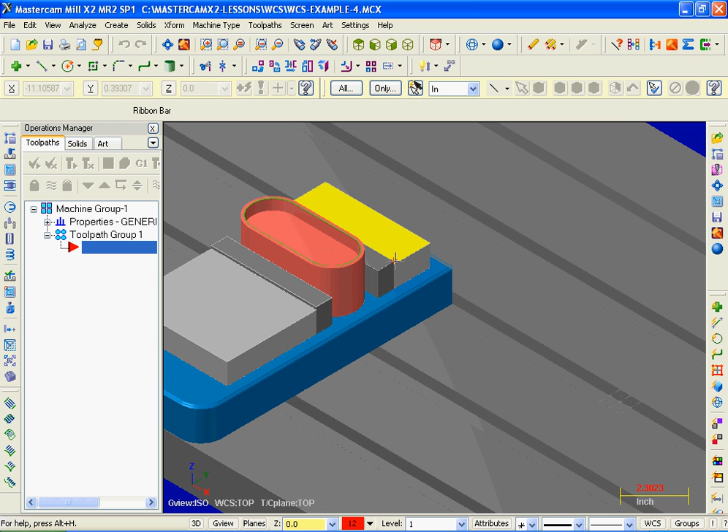Let's just zoom in on the left part. This red point denotes the touch-off point for the left part, and over on the right this red point is the touch-off point for this part. Let's get a screen fit. Now I'm going to use the View Manager to set a new view for each fixture and instruct Mastercam which offset is associated with each view.

For this video I will assume that the machine uses G54 to G59 for work offsets. I'm going to use offset G57 for the left fixture and G58 for the right. So let's get started. In the lower right corner of the screen, I'm going to click on WCS and then select View Manager.

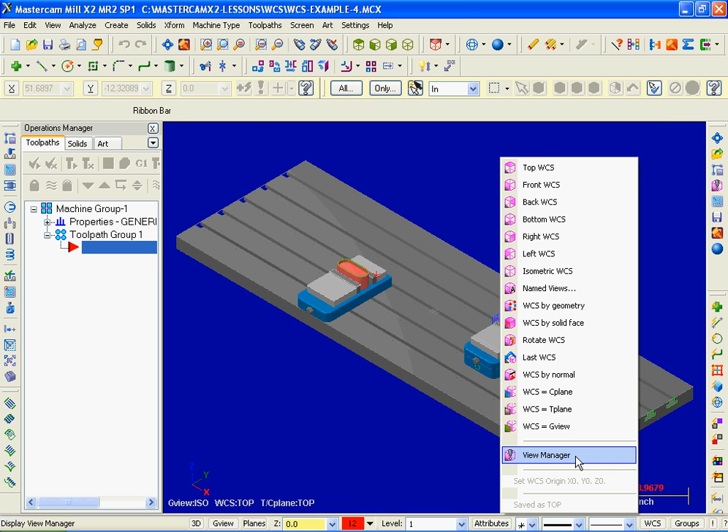Now the two views I'm going to create are in the same plane as top. So I'm going to copy top and then change the origin. So top selected, just going to slide over to the left and click on copy. I'm going to click in the name section for this new copied view at the bottom. I'm going to change the name to G57 left view.

Now sliding on down below, for the work offset number, I'm going to change this to 3. Now this tells Mastercam to output a G57. 0 is equal to G54, 1 is equal to G55 and 2 is G56. I'm also going to put in a comment. I'm going to click in the comment area and input offset for left fixture.

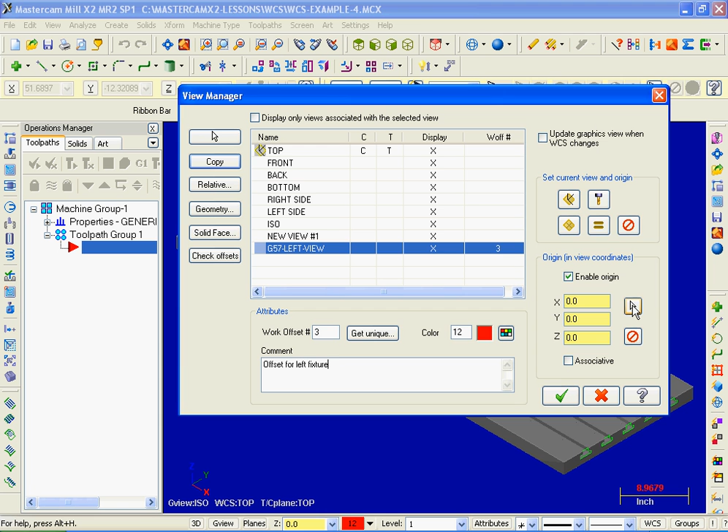Sliding over to the right in the origin section, I'm going to select the arrow and select a new origin for the selected view. I'm going to zoom in on this left part and pick this point. And here we are. There's our X, Y and Z. Now for the right part.

As before, I'm going to select top and then pick copy. I'm going to click in the name and change the name to G58 right view. Now down below in the offset section, I'm going to input 4 and that will output a G58. Now in the comment, offset for right fixture.

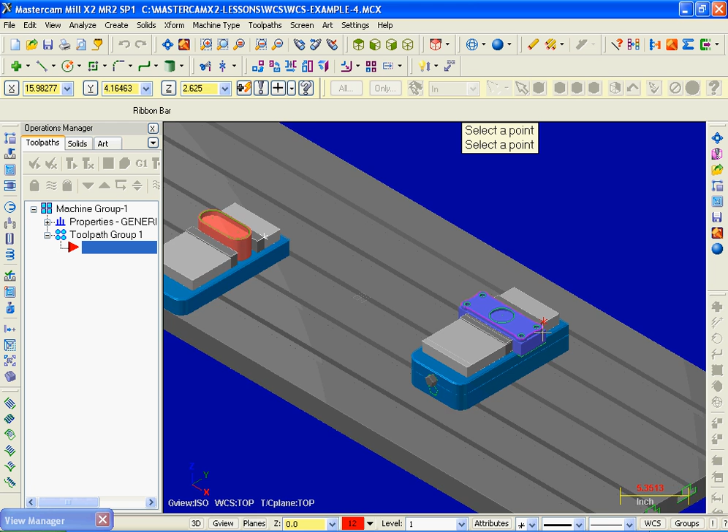Sliding over to the right, once again in the origin section, I'm going to click on the arrow. I'm going to do a screen fit and let's zoom in on this right setup. I'm going to pick this point and there's our X, Y and Z values. Everything's looking good. Now the first machining operation that we're going to complete is the pocket on the left setup.

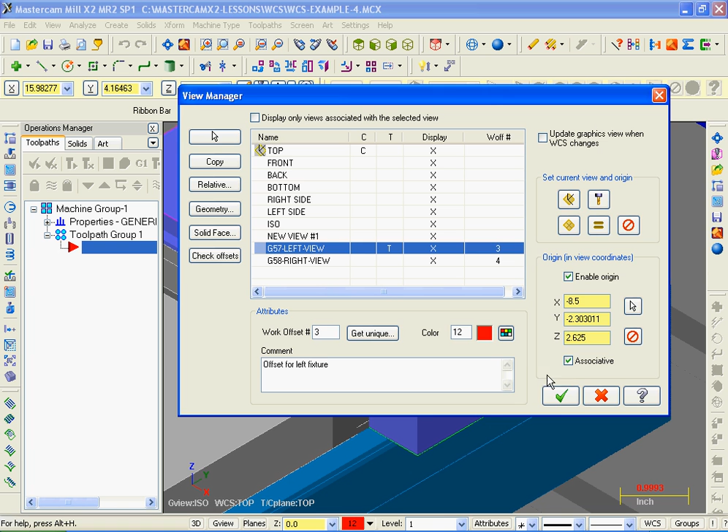So I'm going to click on G57 left view, slide over to the right and activate the T-plane. I'm going to pick OK. Let's do a screen fit and zoom in on this left pocket. I'm going to move up into toolpath and select pocket. I'm going to accept this name.

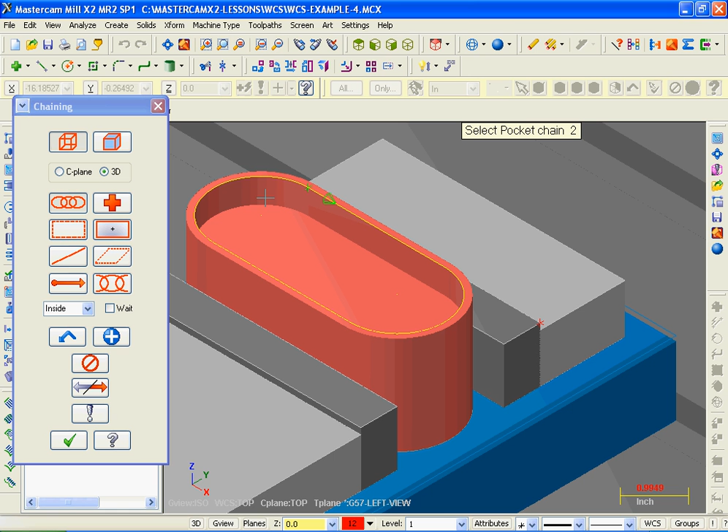Now on the left of the screen is the chaining dialog box, chain set. I'm just going to move on over and pick this line and it successfully chained the pocket. I'm going to pick OK. I'm going to use a 3/4 end mill to machine out this pocket. Not going to change anything else here, just go over to pocket parameters, and I'm going to change the depth to 0.5. I'm done here.

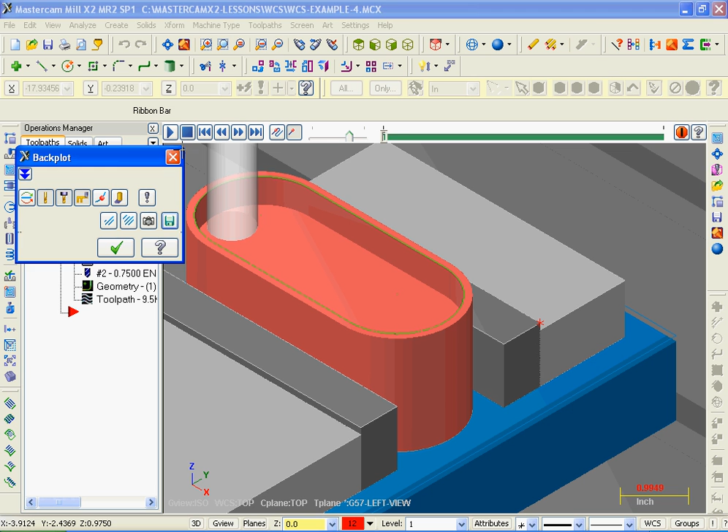Let's backplot our toolpath. So there's our first toolpath, the pocket toolpath, on the left hand setup. Next up, we'll do the contour for the right hand setup. That looks good. I'm going to pick OK. Let's do a screen fit. Let's zoom in on the right hand setup.

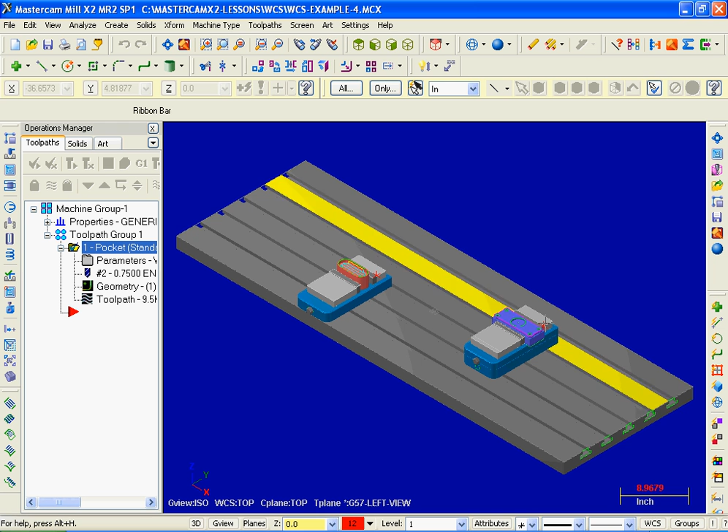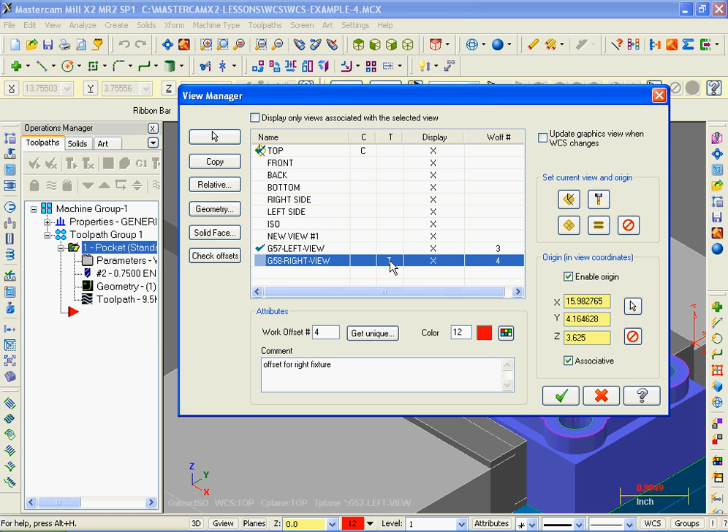Now, let's move on down, and I'm going to click on WCS and go back into the View Manager. I'm going to select G58 Right View and slide over to the right. I'm going to activate T-Plane for this view and then pick OK. Now we're going to machine around this contour. I'm going to go into Toolpaths, Contour, chaining dialog box appears. I'm going to pick this line. Looks good. Going to pick OK.

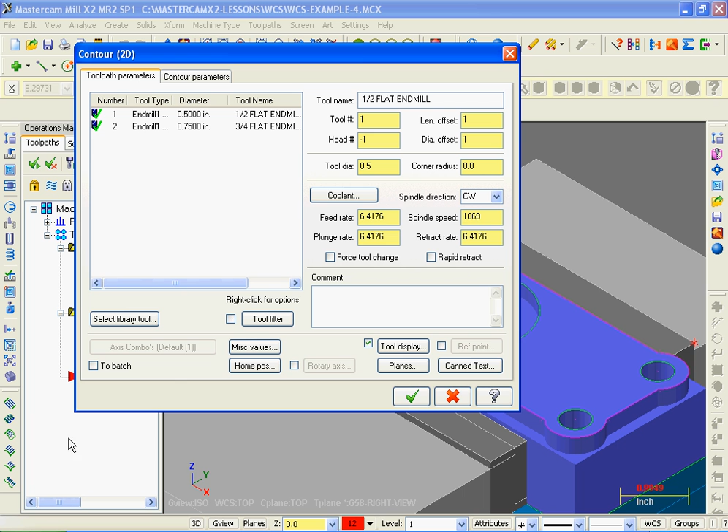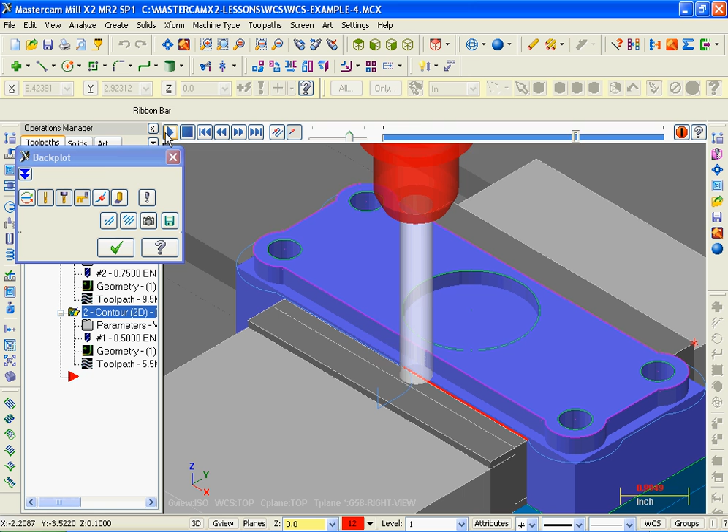I'm going to use a 1/2 inch end mill. I'm not going to change anything else here. Go over to Contour Parameters. I'm going to make the depth 0.1 and then pick OK. Let's go and backplot this toolpath. And there's our contour toolpath. Looks good. I'm going to pick OK. Let's do a screen fit.

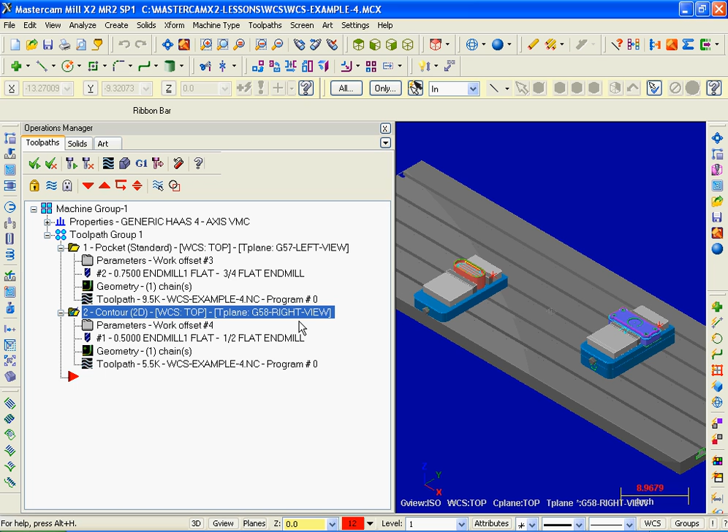I'm just going to open up the Operations Manager over on the left and show how the operations are identified with the two offsets, G57 left view, G58 right view. Just close that up. Now let's make some code. I'm going to select all operations and click on Post Selected Operations. I'm going to pick OK. I'm going to accept this name. Do you want to replace it? Sure. I'm going to hit yes.

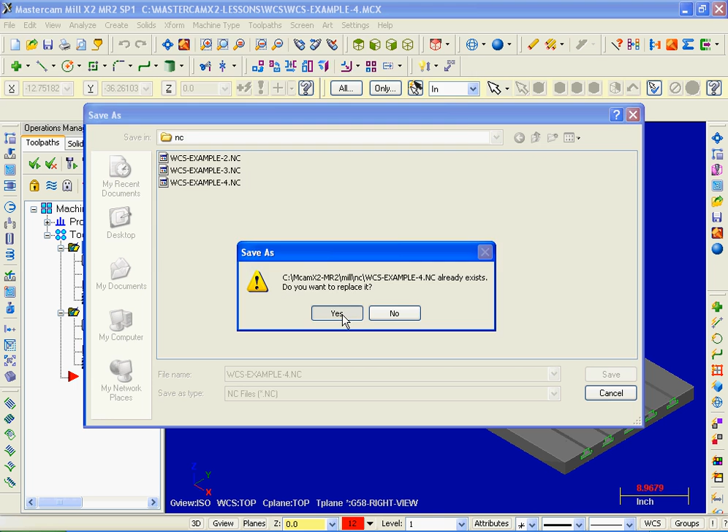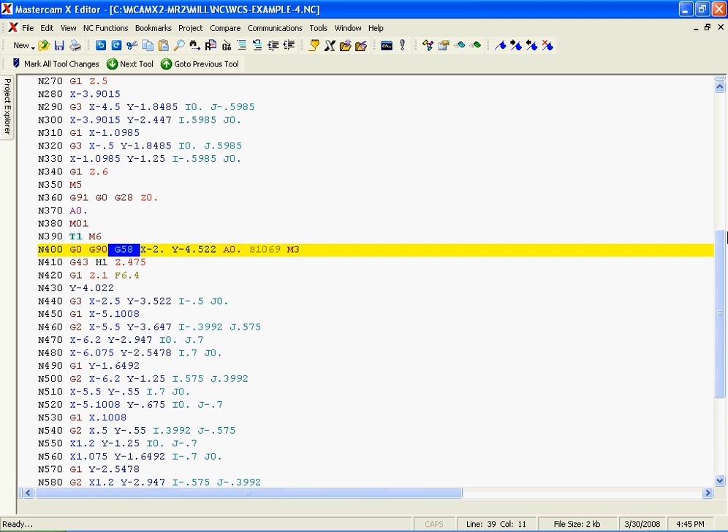Now let's go and check out the CNC code. Here's our program. At the very beginning there's our G57. That's what we set up for the left part. Now if we scroll down and then we pick up the next tool, there's the G58. So the origin has been reset for the new origin for this right hand setup. G58, and we kicked off with G57. I'm just going to close this up, and that completes this video.